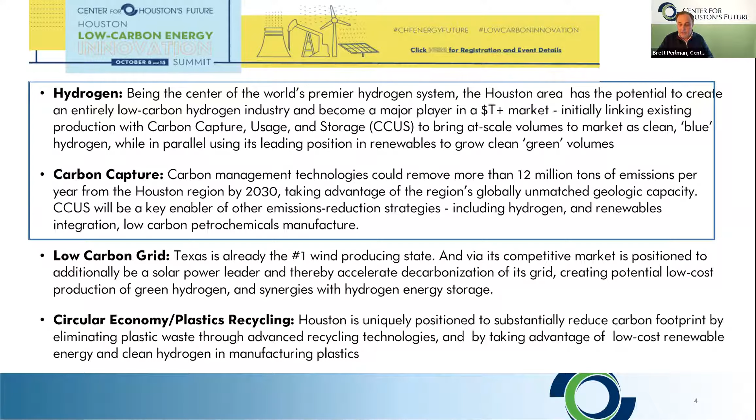For those of you who didn't see the paper on Monday, some of our work was highlighted in this Houston, Texas Inc. section, which really told the story of how Houston is positioned to become a leader in hydrogen energy. And as I mentioned in the article, and this was quoted in the story, we don't think of hydrogen today as a separate industry, but if we start to think about it, Houston can be a very important and large player, not only in the US, but globally. So that's kind of what we'll be discussing today.

So I'm pleased to welcome today Daryl Wilson, who's the Executive Director of the Hydrogen Council, to discuss a vision of the role that hydrogen can play in decarbonizing the energy sector. And Daryl, you can go ahead and turn your video on there. Hi Daryl.

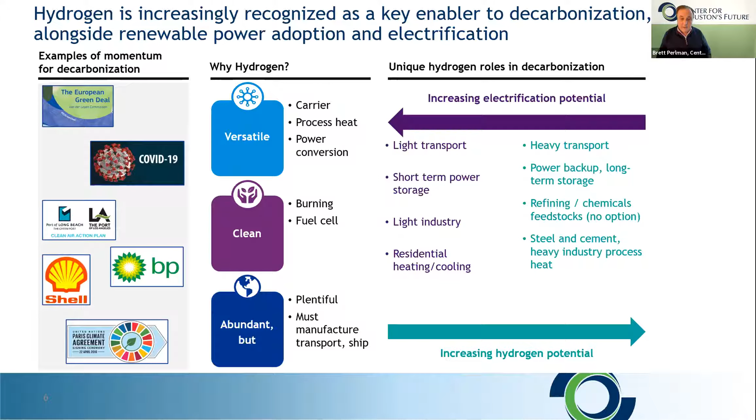And it's very plentiful as well, but it requires a manufacturing process to create. It doesn't exist on its own in nature. And so how we create hydrogen, which we'll talk about in a second, is going to be part of the story. It also has lots of applications in transport and power storage, and in fuels.

So in terms of hydrogen, how we get hydrogen, there's two basic ways today. One is through a process called steam methane reforming, which takes natural gas, takes it through a production plant, and then today that creates hydrogen and CO2. And then going forward, that CO2 can be captured and stored, and then can be used in these different applications.

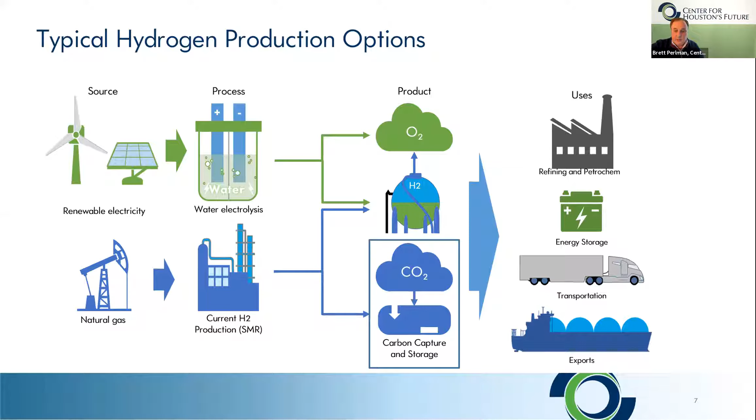Tomorrow, in the future, we may have another option for hydrogen, and that's through creating it through renewable energy, which is very abundant in Texas, through a process of electrolysis that basically creates hydrogen and oxygen. And so both of these ways of creating hydrogen, I think, are ways that we will have in Texas going forward. Today, we primarily have that first way that I talked about, which is through the process of steam methane reforming. And this is a picture of the assets that we have in Texas.

It's quite an interesting story because as I mentioned, we are one of the world's largest producers of hydrogen with the system that we have in the Gulf Coast. We have over 900 miles of hydrogen pipelines, over 50% of the US capacity and 32% of the global pipelines. We produce 3.4 million metric tons of hydrogen annually through the steam methane reforming process. And that's about 34%. So the US produces about 11 million metric tons of hydrogen.

And one of the places that has been lauded for its hydrogen production or its vision for hydrogen is Rotterdam, and they've done an amazing job. But this system is 8.5 times the size of the Rotterdam system. So the opportunity, if we can create a vision for hydrogen in Texas, is absolutely immense.

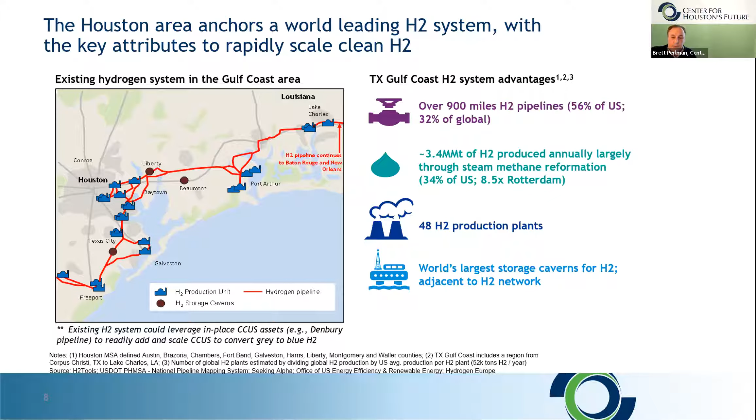We have 48 plants producing hydrogen, some of those dedicated, some of those producing what's called byproduct hydrogen. And we also have something that's unique in the sense of we have a very large network of storage. And so the combination of hydrogen and perhaps storage may be something we talk about and may provide some of those reliability benefits I mentioned a few minutes ago.

So how can hydrogen be used? As I mentioned before, it can be used in trucking and transportation, primarily in trucking. And we'll talk perhaps a little bit about why that might be. It might be injected into gas networks and used as a way to decarbonize our gas system. It might be used in industrial heat processes as well. So these are just a couple of the ways in which hydrogen can be used.

And we at the center have done extensive work in looking at these applications and are starting with some pilots to catalyze some of the early work that we think can be done to start to build this ecosystem of hydrogen in the Gulf Coast region. Perhaps more on that as we move through the year and talk a little bit more about our work.

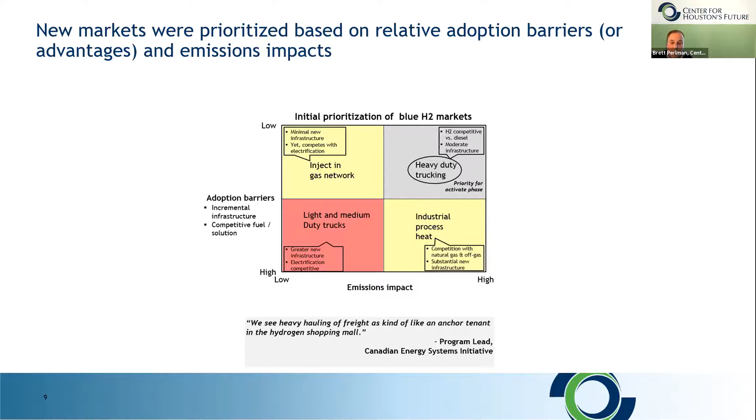And then over time, growing a green path as well through electrolysis and through the extensive amount of both solar and wind that we have in Texas. And so really, this is, I think, a bright future for what hydrogen might become.

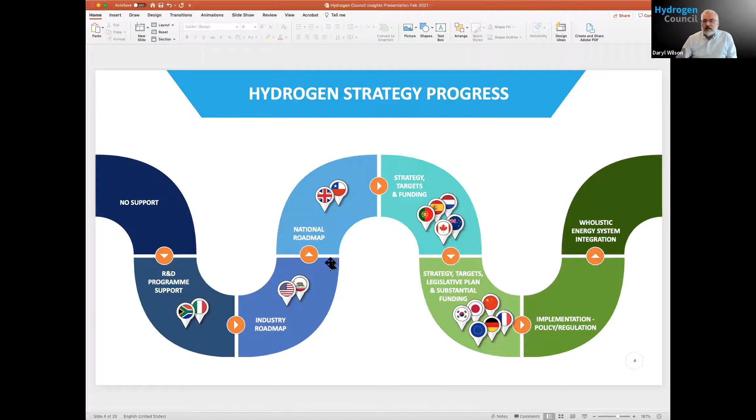Okay, good. A very large amount of money has started to flow into the sector.

So you can see across here announcements of funding in the order of 11 billion in Germany, almost 11 billion in Spain, and 9 billion in France. A very large number still under development in the European Union. And again, when it comes to the North American side of things, the US, Canada, much smaller by comparison to what's going on in Europe.

An important thing that's brought out in this slide is as these policies are set around the world in various countries, we pay attention to whether it's focused on the upstream or the downstream, the generation and supply of hydrogen, or the offtake and use of hydrogen. And the most mature policies are actually focused on both the upstream and the downstream. So there's a lot of good thinking around the offtake demand for hydrogen as well as the supply of hydrogen.

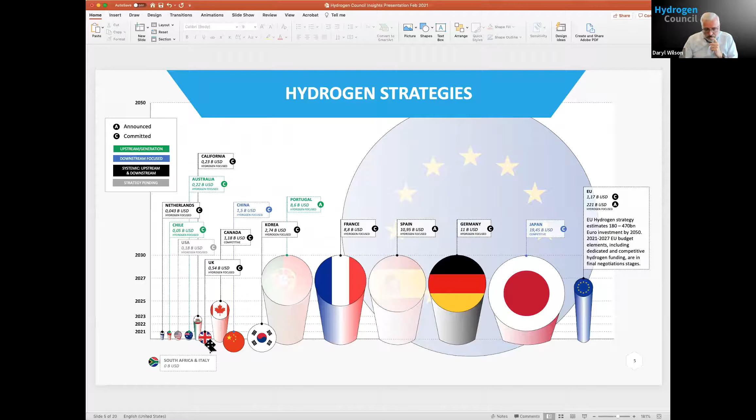Just this week, the Hydrogen Council produced its latest report publicly. This is available on the Hydrogen Council website. Here we're tracking investment in the sector and profiled 228 recently announced projects. 90 of these having to do with large-scale industrial usage of hydrogen, 50 in transport, and then the balance in various other applications. And you can see out of 228, 126 are based in Europe. So lots of activity in Europe, Asia, and Australia.

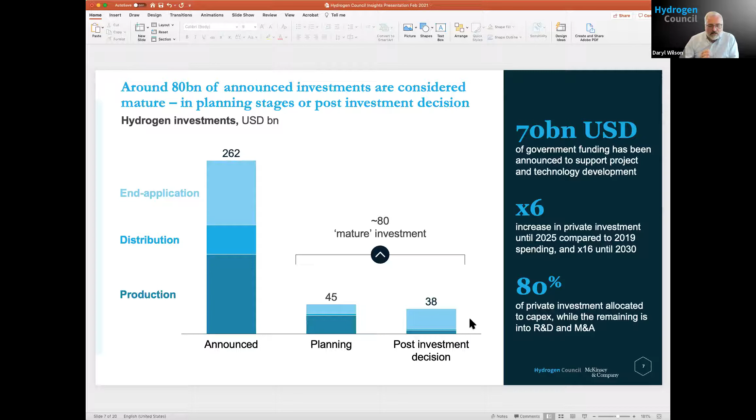The total expenditure that's forecast on this portfolio of projects is more than 350 billion US dollars. That's 350 billion US dollars. And the portion that's beyond the initial investment decision and into engineering planning totals 80 billion. So there's a lot more going on in hydrogen than perhaps you realized, and a lot more money starting to move into the sector. So let's talk a little bit more about why this is happening and where it's happening.

Back on the council just briefly, one of the key things that we do is aggregate data from industry. So from our more than 100 members now, we collect their projections on cost and forecast on hydrogen demand and application maturity. And then we produce reports based on the aggregated data that's been processed through a clean room so that the confidentiality of the data is maintained. But it's a very, very strong fact base in order for us to speak about the progress of the sector.

The sector is multi-dimensional, and this is a depiction of all of the different ways that hydrogen can interact in the energy economy. You probably are aware that while hydrogen is naturally very prevalent, in fact, the most prevalent element in the universe, you can't dig it up out of the ground in an easy manner. And so it functions as an energy carrier, not as an energy source. And as Brett was saying earlier, there are two methodologies to produce hydrogen, one through electrolysis, the splitting of water, and the other to strip hydrogen from natural gas. And more than 95% of the hydrogen produced in the world is actually through the natural gas pathway today.

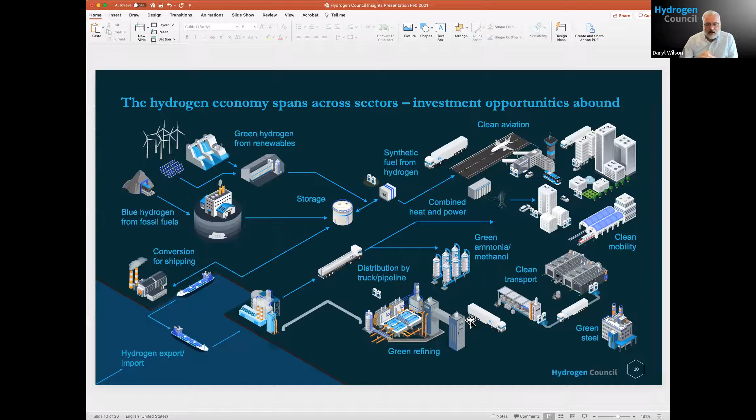But once we have the hydrogen, it can function in moving energy around in our economy in many, many different ways. And so to help us understand the current maturity and competitiveness of these different applications in hydrogen, we use a chart with this profile. So moving from the bottom to the top, these are the solutions that are the most competitive low carbon solution. And then moving left to right, as you move more to the right, hydrogen is more competitive relative to conventional options for whatever that application might be. So the sweet spot in this chart is the upper right-hand quadrant.

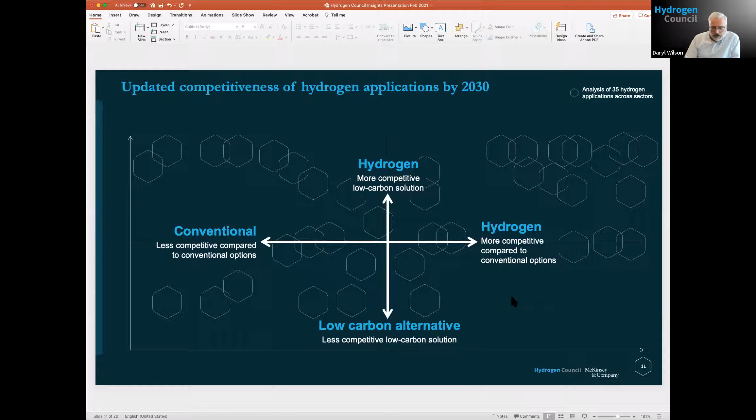In January, we produced another report showing the different decarbonization pathways using hydrogen and the extent of CO2 and greenhouse gas emission reductions. And here you can see across the slide on many, many different applications, hydrogen can deliver between 80 and 95% decarbonization. And this is in fact the main policy vector that's causing a lot of attention to turn to hydrogen now. In fact, those who are pursuing the goals around climate change mitigation under the Paris Accord need to realize that really those goals cannot be achieved without bringing a very strong contribution from hydrogen.

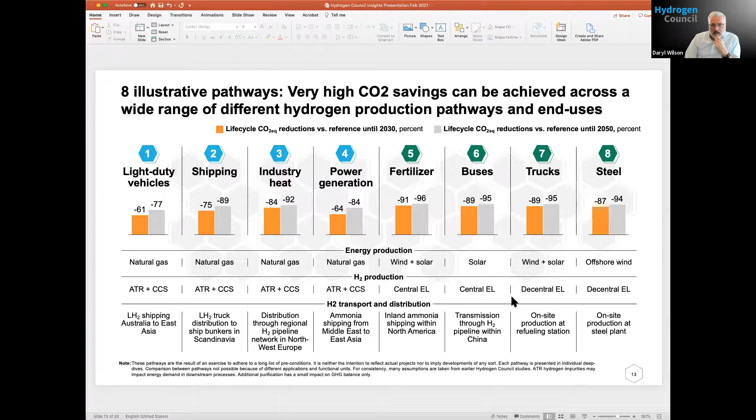So approximately 20% of the world energy use forecasted by 2050, if we're using the climate change goals under the Paris Accord as a reference point, 20% of the energy used at the point of 2050 would actually be in the form of hydrogen. So that's kind of where the sector impact and full maturity shows up. To get to that point in 2050 would be a $2.5 trillion investment. So there's lots of investment flow and employment and economic impacts in adopting hydrogen at scale with the vision through to 2050 from the decarbonization point of view.

You may be familiar with the blue and green and other colors debate in hydrogen. This issue is addressed in our January report as well on decarbonization pathways. Essentially, our view is that if we want to meet our decarbonization objectives through to 2050, we must be using a combination of blue and green hydrogen. The merit advantage of blue hydrogen is those projects will typically be at larger scale, faster, and at a lower cost than the green hydrogen projects. Over time, we expect green hydrogen to become more cost competitive, and actually take a strong place in the long-term picture, but blue hydrogen absolutely has an important contribution.

Brett was mentioning earlier that Texas is one of the major centers in the world for the production of hydrogen, mostly in the support of the refining industry. And so you have a lot of practice around producing hydrogen in the gray approach, the steam methane reforming approach. This is where hydrogen is produced and no CO2 is captured. With blue hydrogen, we're producing the hydrogen from steam methane reforming or autothermal reforming, and then capturing and sequestering the carbon. And in fact, the state of Texas is the home to the largest capacity in the world of carbon capture and storage technology. So this brings in another dimension of your local natural skills endowment and resources and know-how. You're already deeply involved in Texas with the production of blue hydrogen.

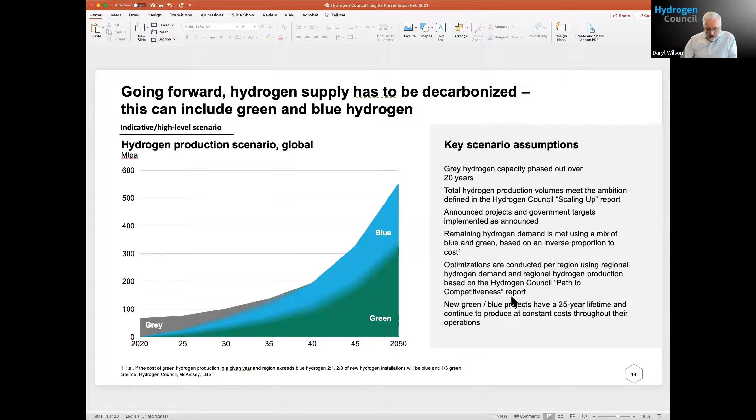And then on the green side, there's also a Texas story, because I'm well aware of all the wind power and solar power that's being developed over a long number of years. And so you have the input energy for the production of green hydrogen with electrolysis. When I mention renewable energy, it's important to have a vision how the ongoing deployment of renewable energy is an integral part of the growth in the hydrogen story.

On a global basis, we see, to fulfill that vision I was showing on the previous slide, that there would be a requirement for more than 27,000 gigawatts of capacity in renewable energy production. That's enough wind to completely surround the British Isles, or enough solar to fill up 40% of the country of Spain. Now that's the renewable energy required on a global basis to fulfill the vision of hydrogen that I was sharing from the earlier slide. But it just gives you a very graphic illustration of how these two things go hand in hand.

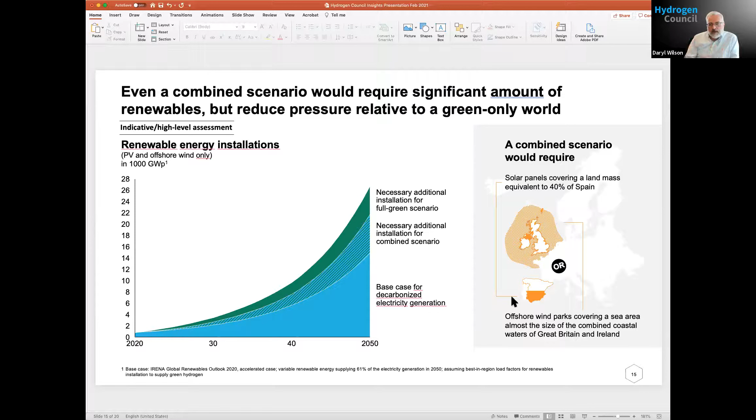And in fact, hydrogen technology is a wonderful storage container for renewable energy. We're well familiar, of course, with storing energy in batteries. But battery technology, from a storage capacity point of view, as far as kilowatt hours or gigawatt hours are concerned, batteries are pretty small containers. By contrast, the amount of energy that can be stored in hydrogen is dramatically higher. And that's why hydrogen technology is being seen as a very strong complement to the ongoing deployment of renewable power generation.

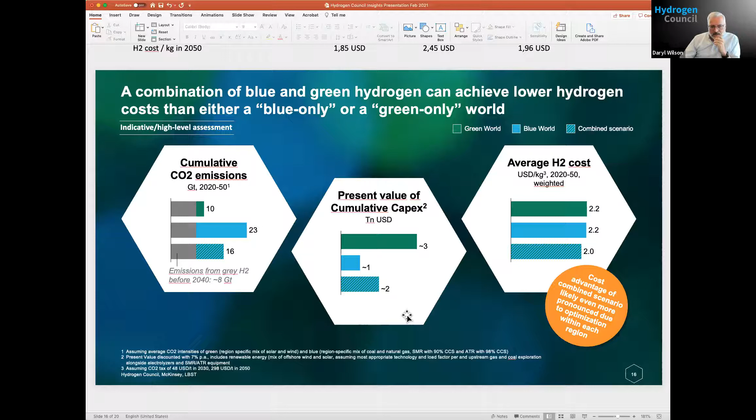And then on the left-hand side, you can see the amount of emissions that would be generated from the all green story versus the all blue story versus the combined story. So naturally, if we did an all green scenario, that would result in the lowest amount of emissions being generated between now and 2050, whereas the combined story at 16 gigatons would be somewhere between the all blue and the all green story. Part of our work on the council is to forecast the economics and cost profile of the technology as it continues to mature.

So what we expect to have happen is, depending on the region or the area, there will be a bias toward the green story or the blue story. Or in special cases like Texas, you'll actually have both the blue and green story unfolding likely together.

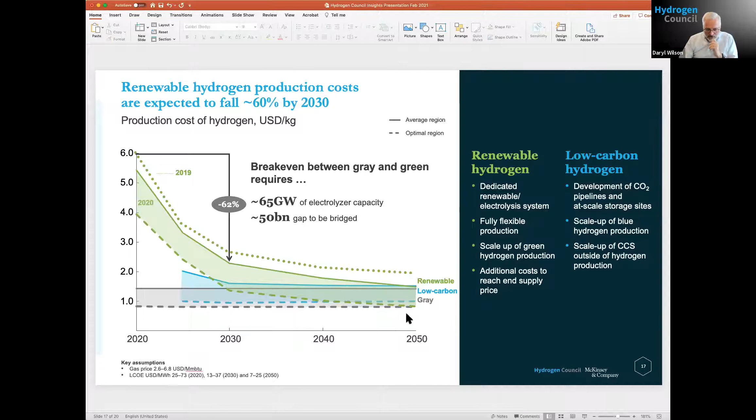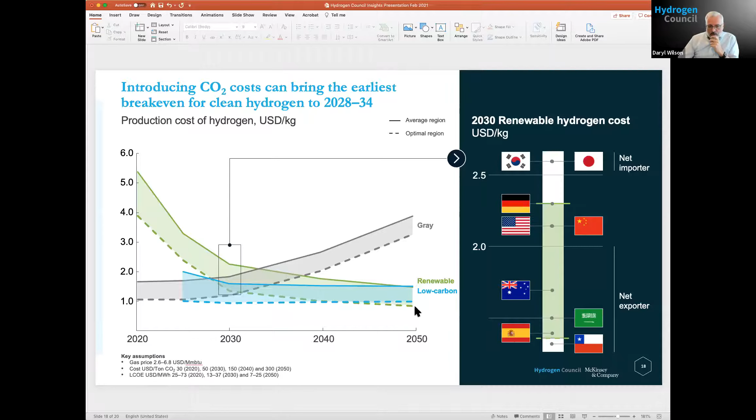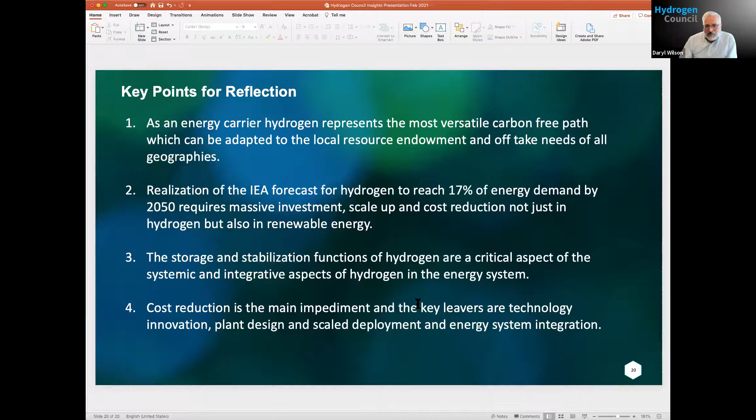And why don't we start with the last point you made? Obviously, this week, people's thoughts are really on energy and electricity in particular. And one of the things I think we're learning is that, we don't know what had caused the blackout, but one of the hypotheses is the lack of integration perhaps between the gas system and the electric system.

So could you just, and I know you're not an expert in Texas, but can you opine about the role that hydrogen might play? I think the point you made just a second ago about sort of bringing these two different worlds together. How might that play out in a place like Texas, do you think? For sure. So this is the point about resilience, and you're living that this week. It's a very difficult situation, I'm sure, for many of you.

Typically, diesel generation has been the emergency energy backup means, and I'm sure there's lots of diesel generators running in the state today. Hydrogen has the full capability to displace diesel. And I've lived this in my own history. Our hydrogen technology company from Canada was bought by one of the largest diesel engine manufacturers in the world, Cummins. And there's good reason for that.